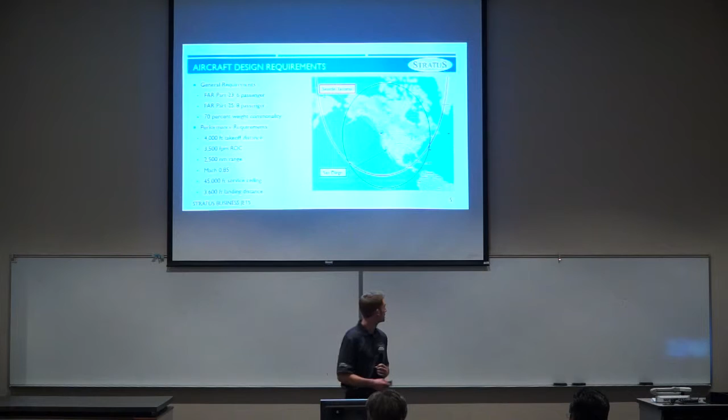excluding the engines. So in addition to short takeoff and landing field requirements, the primary objective of the Stratus jets is to provide comfortable, high-speed, long-range cruise. A range requirement of 2,500 nautical miles and a maximum cruise Mach number of 0.85 will allow customers to make the coast-to-coast journey in a reduced amount of time. As you can see by viewing the range map on the right side of the slide, even when departing from one extreme corner of the country, the range requirement is still enough to reach any other location in one non-stop flight.

Thank you, August. So, as he said, I'm just going to give you a brief summary of our conceptual design approach. Start off here with the constraint analysis for our 8-passenger Aria-1000. As you can see, we drove our design point down and to the right. By doing so, we maximized our wing loading and minimized the planform area of our wing, also driving down our thrust-to-weight ratio so we do not have unnecessary thrust and are minimally compliant. This leaves us with a thrust-to-weight ratio of about 0.4, wing loading of 66 pounds per square foot, thrust available of 8,800 pounds, and our max takeoff weight is 21,400 pounds, leaving us with a wing area of about 326 square feet.

Similarly, for the Aria-2000, our 6-passenger, again, the design point was driven down to the right. Thrust-to-weight ratio is a bit more here at 0.44. Our wing loading has dropped down slightly to 59 pounds per square foot. The thrust available is now 8,200 pounds due to the decrease in weight, which is now 18,700 pounds. Our planform area for the smaller jet is 318 square feet, which is only 8 square feet smaller than the larger one.

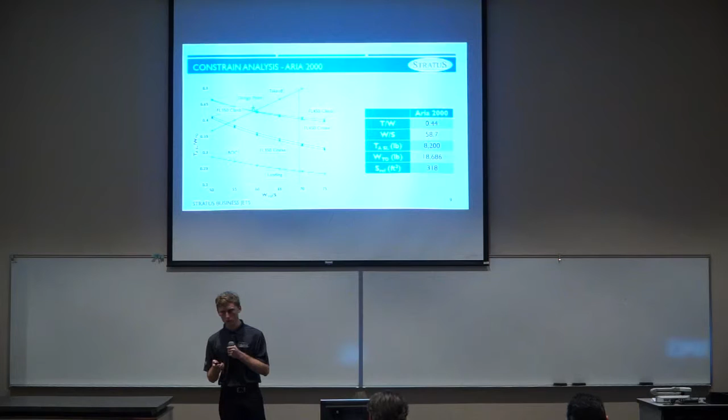So for our initial sizing, we started off with Roskam's Part 1. From this, we were able to output our fuel weight, empty weight, and max takeoff weight. Between these outputs and our constraint analysis, which was previously shown, we were able to come up with a planform area for our wing and the thrust required to meet our mission requirements.

So for our conceptual approach, above all else, was to be minimally compliant with the requirements set forth in our RFP. This includes the FAR Part 23 and Part 25, which was previously mentioned. We went ahead here with an inside-out approach, beginning with our cabin layout. As you can see, that is the cabin layout for the 8-passenger Aria-1000. We elected to have 2 seats facing forward and 2 backwards to package our passengers in the most efficient way.

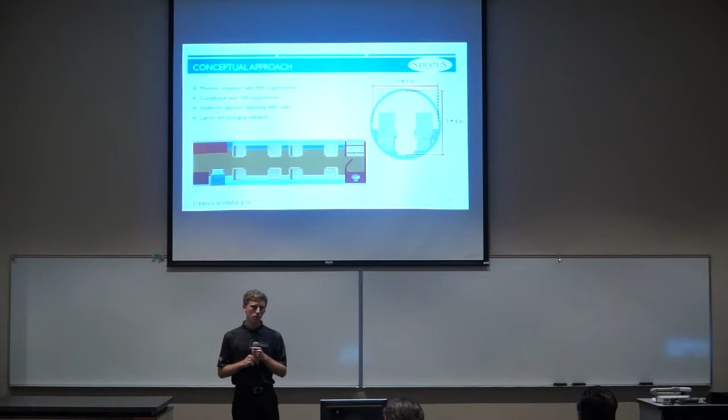That is also a cross-section of our cabin with a 5.5-foot overall height, including the step, and 5 3/4 width. This was determined based on comparable aircraft and also size to feel after our team visited Textron Aviation Service Center. So some of our most marketable features are our long-range capability, as previously said. We hit 2,500 nautical miles, which sets us apart from our competitors by about 20%.

We're also able to cruise at Mach 0.85, which lets our customers get to any destination they wish in a quicker manner. We have a large baggage area, as you can see. It can fit several golf bags and suitcases. There's about 100 cubic feet in the tail cone, as you can see there. We also have several windows and 2 skylights, which are not visible in this image, and those allow a lot of natural light for our customers. Lastly, we are capable of short field takeoff and landing, giving our customers access to a much larger number of airports.

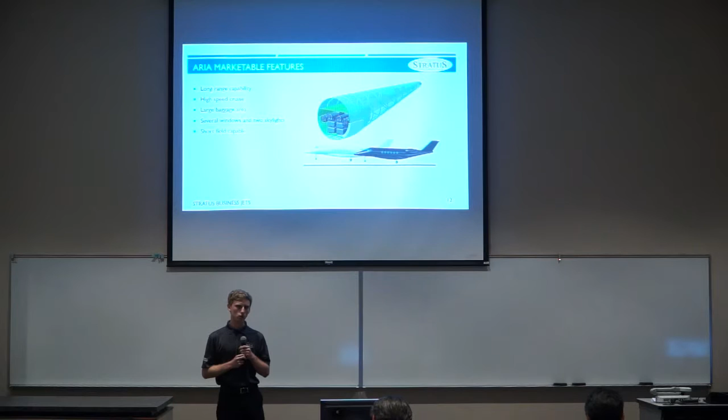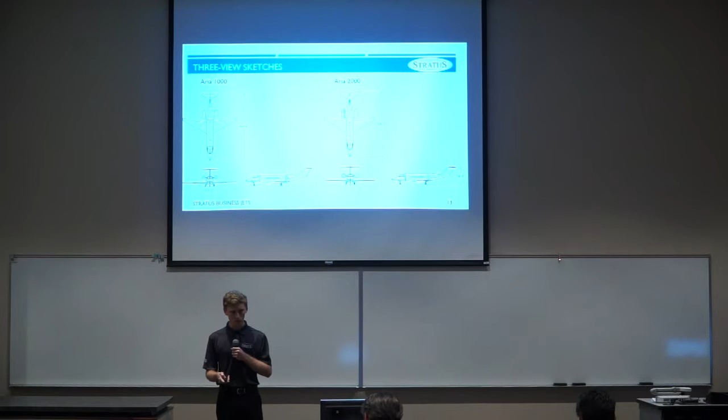So next up is Kyle Wimmer. He will be talking about aerodynamics. All right, thanks, Blaine.

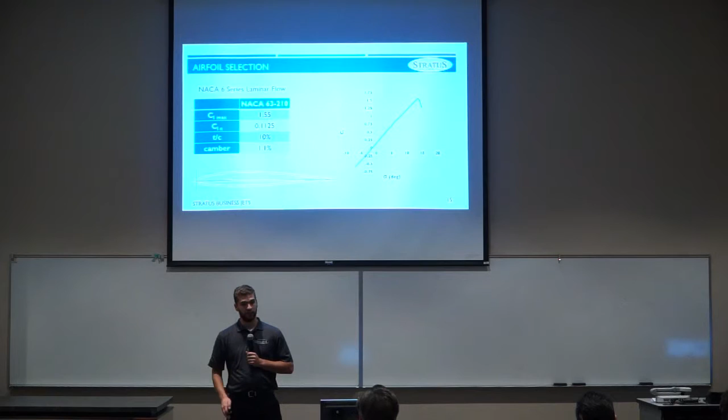So the first decision we had to make was what airfoil we were going to be using. We decided to go with a NACA 6 Series laminar flow airfoil, specifically the 63210. This is a 10% thick airfoil with a 1% camber. This allowed us to reach a critical Mach number of about 0.74 with this airfoil. Once we had the airfoil selected, we then began wing design. Knowing our reference or our planform area from the constraint analysis, we were able to begin sizing the wing.

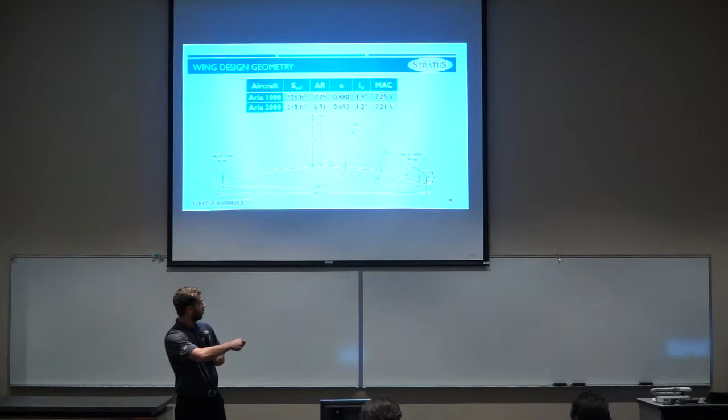As you can see here with the Aria 1000 and 2000, they are slightly shorter in wingspan. We just clipped the tips a little bit to adjust for the wing loading for the Aria 2000. This yielded us an aspect ratio for the 1000 of about 7.75 and about 6.9, with an E of 0.68 for the Aria 1000 and 0.69 for the Aria 2000. Once we knew our cruise weight, we were able to calculate the lift needed and solve for the incidence angle of the wing. This helped to minimize our trim drag throughout our cruise phase.

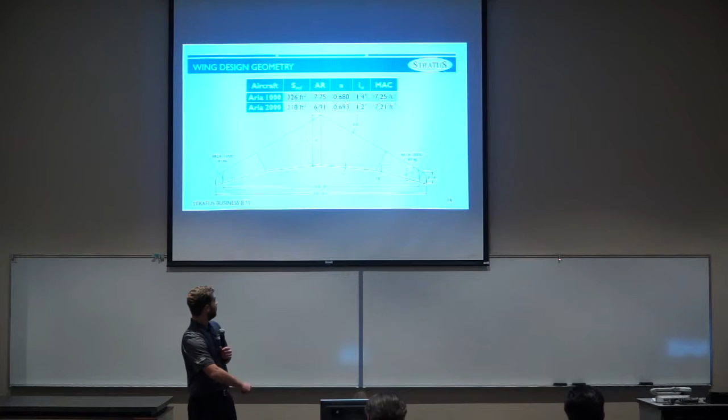We did sweep the wings approximately 29 degrees, and this allowed an increase in our critical Mach number from 0.74, as I previously mentioned, to almost 0.77. Once we had the wing, we were able to adjust the 2D lift curve slope for the airfoil to a 3D for the wing. This yielded us a CL max of 1.25 at a takeoff condition with 15 degrees of flaps, at cruise 1.0, and at landing with 35 degrees of flaps, 1.53. Our required CLs for takeoff and landing are below the maximum, allowing us to stay out of the stall region.

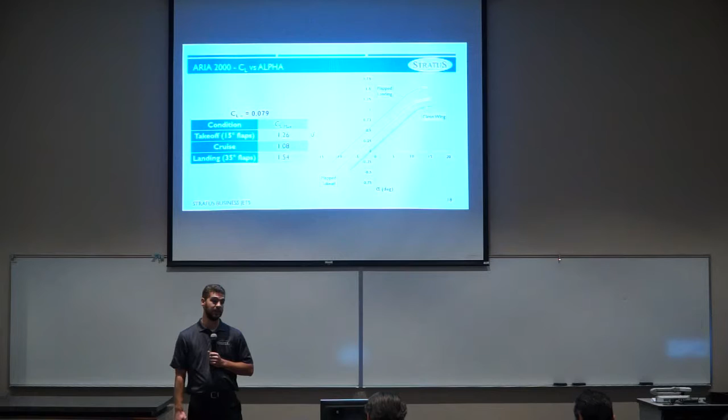Though the CFE method is fairly accurate for a first estimation, we did go more in depth, calculating the CD0 for each component and summing them all up. This allowed us to take into account transonic wave drag once we hit our critical Mach number.

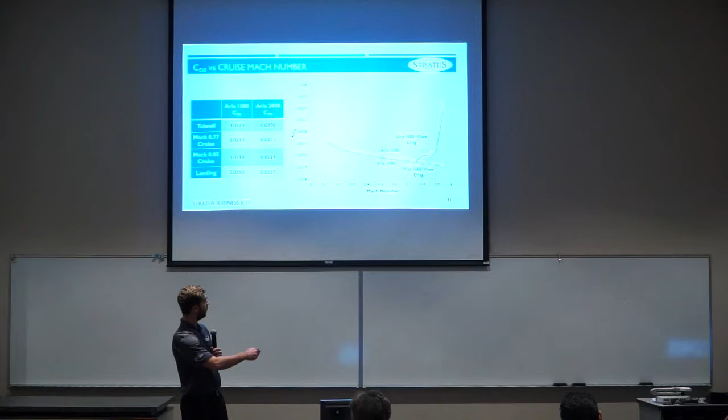The table on the side shows all of the CD0 values for various phases of flight, as well as the figure which shows where our transonic wave drag kicks in. Once we hit our critical Mach number of around 0.76, we start to get a slight increase due to the transonic wave drag. That increase spikes once we hit our drag divergence Mach number between 0.85 and 0.9.

A similar method was done for the Aria 2000. However, due to a slight increase in the CD0 values for the Aria 2000, the maximum L over Ds did decrease to around 13.5 and 13 respectively.

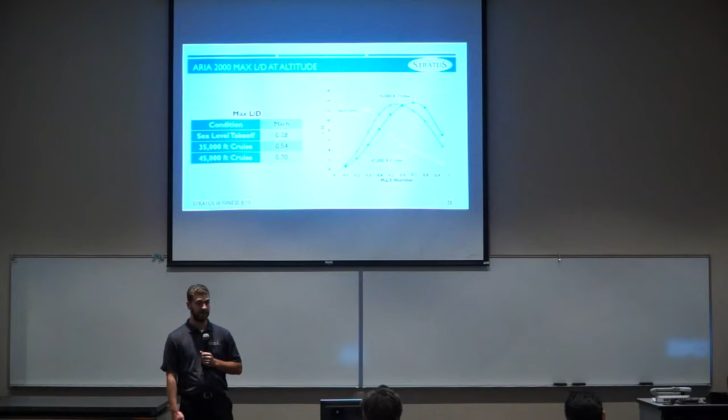And the same was for the Aria 2000. Again, due to the increase in CD0, the maximum Mach number for the best L over D did decrease slightly.

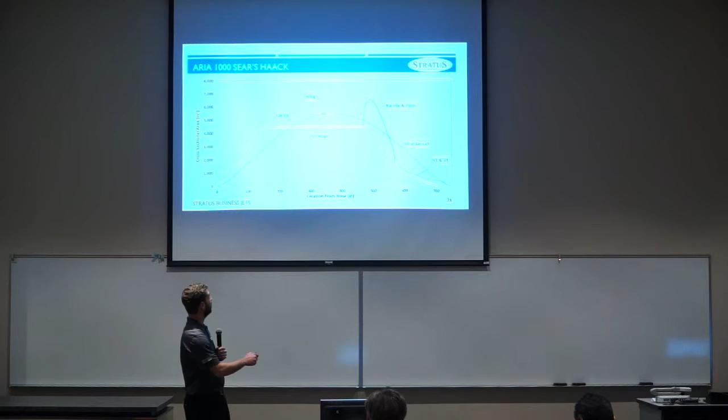Since our aircraft is cruising at a high Mach number, we looked at a Sears-Haack of the aircraft. The dashed blue line is of an ideal aircraft, and as you can see, we're far from it. This is due to the nature of business jets, the placement of the wing and engines, creating the double bump, which you see here. This is just the price that we have to pay for this type of configuration.

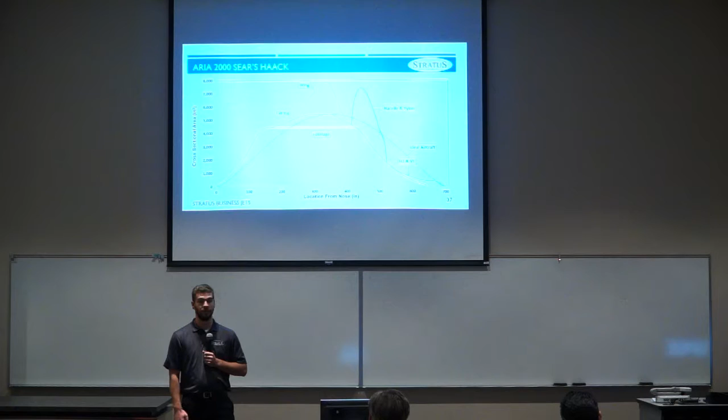The fairing, though, does do a nice job of smoothing the transition between the fuselage and the wing, which is one of its main purposes. The same was for the Aria 2000, with a slight increase in the nacelle and pylon due to a longer nacelle for a longer engine, as well as a little larger diameter. Next, I'll pass it off to Sho for performance.

My name is Sho, and I'll be introducing performance of our aircraft. Thrust available and thrust required for these two aircraft were calculated using the density ratio and the TSFC ratio according to each altitude of the aircraft. For Aria 1000, we have an initial rate of climb of 5,000 feet per minute, which is right after the takeoff.

And max rate of climb at 35,000 feet altitude, which is the cruise altitude, we have 2,200 feet per minute, which is shown in the blue lines. And at the service ceiling, we have 700 feet per minute. For the service ceiling, we are required to have just 100 feet per minute, which is exceeded very well, shown in the green lines as well.

For Aria 2000, we have an initial rate of climb of 5,100 feet per minute, and at 35,000 feet, which is the cruise altitude, we have 2,200 feet per minute, and at the max service ceiling of the aircraft, we have 550 feet per minute, which is shown in a green line, as well as the cruise altitude on the blue line.

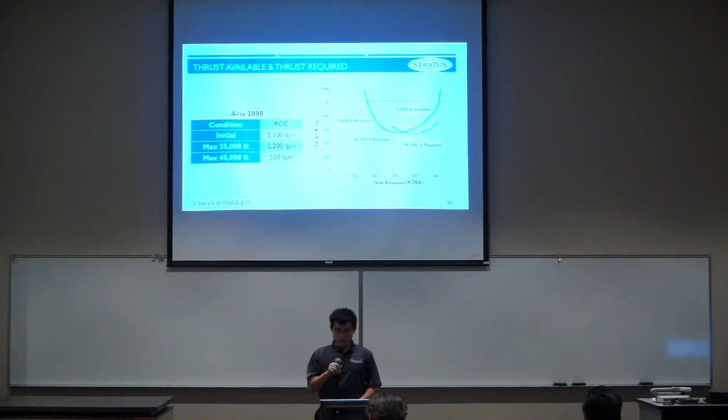We get the specific excess power envelope. This is also analyzed using density ratio and TSFC ratio according to the altitude. On the right side of the plot, we have an anomaly going on. However, this is possibly due to the fact that the aircraft is going at the high end of the subsonic, which brings wave drag in as well, which we think is the case. This will be further investigated next semester in the detailed design of this course. This is the excess power envelope diagram for the Aria 2000.

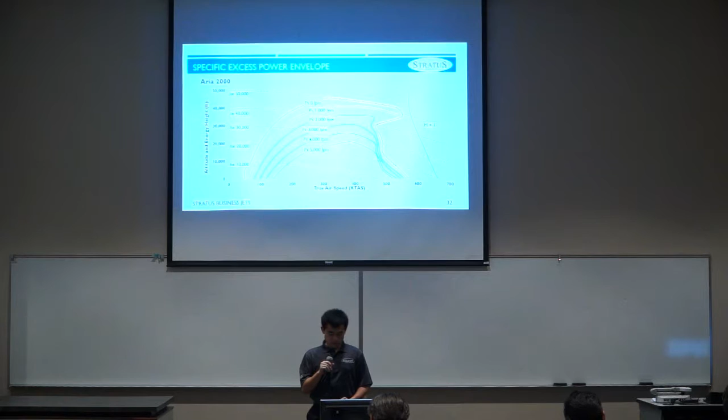Our aircraft market points are the range and the payload that we can have for passengers. For the cruise altitude, we have a 2,500 nautical mile range with 4 passengers and 2 pilots under FAR 25, and we have a linear relationship going down with more payload on.

For the range and speed relationship, we have 2,500 nautical miles at a Mach number of about 0.75. This is without any of the takeoff, landing, or maneuvers. It goes down as the speed goes up. However, since this is a business jet, going faster makes it travel quicker, which is more or less better. And that is something we decided to go with, paying for the drag of the aircraft.

We have a very similar relationship for the Aria 2000 as well. We have 3 passengers as a long-range cruise condition, along with just 1 pilot under the requirement of CFR Part 23. And it goes down to the 500 pounds of maximum payload with 6 passengers and 2 pilots, a total of 8 persons in the aircraft. We have the same relationship with the range and the speed on the right-hand side of the slide.

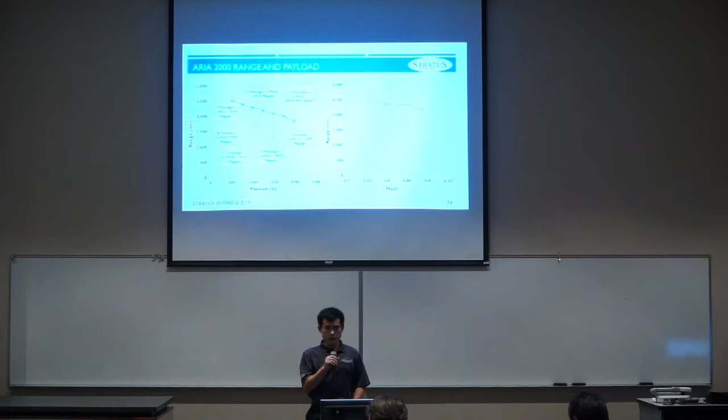For the takeoff of our aircraft, we have 3,780 feet for the balanced field length, which is under the 4,000 feet requirement for the takeoff process. For the Aria 2000, we have 3,400 feet, which is also under the requirements. We have a climb angle of 20 degrees for the Aria 1000. The Aria 2000 has 21 degrees, and the Aria 1000 has a FAR 25 clearance requirement of a 50 feet obstacle. On FAR 23 for the Aria 2000, we have 35 feet of obstacle clearance, and that is included in the calculation.

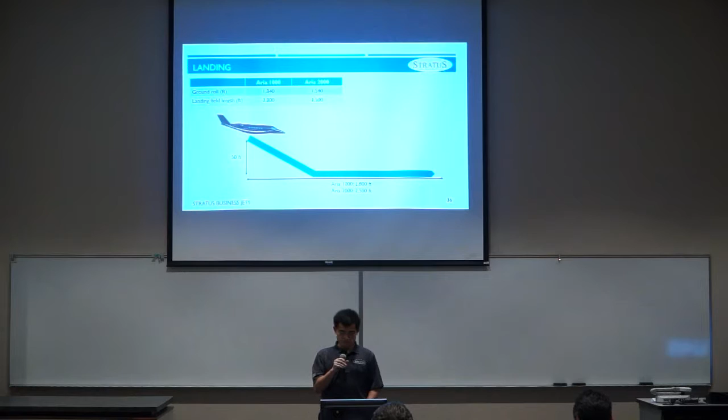For landing of our aircraft, we have a ground roll of 1,840 feet for the Aria 1000 and 1,540 feet for the Aria 2000. For landing field length, the requirement is 3,600 feet: 2,800 for the 1000 and 2,500 feet for the 2000. Both of them are well under the maximum required length. This is clearing the 50 feet obstacle coming into the airport. Now we are introducing propulsion. I will hand it to Tatiana.

Thank you, Sho. I'm Tatiana Toriani, and I'll be talking about the propulsion system for both aircraft. The engines chosen were based off of the thrust-to-weight requirements stated by the design point in the constraint analysis. The Honeywell TFE731-40AR was chosen for the Aria 1000, and it is also used on the Gulfstream G150, which is a comparable aircraft. The Pratt & Whitney PW545 was chosen for the Aria 2000, which is also used on the Cessna Citation XLS, another comparable aircraft.

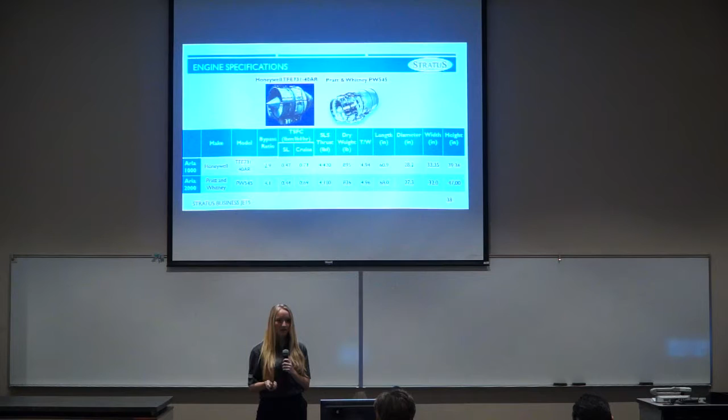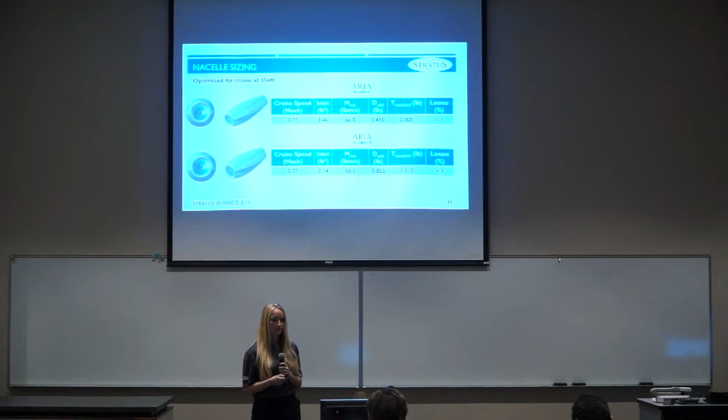Good morning, everyone. My name is Cody Johnson, and I'm going to be talking to you about the stability and control for the Aria 1000 and the Aria 2000. So the basic design for our aircraft was to be minimally compliant with the FAR 23 and 25 requirements, as well as meet any other maneuverability and stability requirements. Our design philosophy was such that the empennage would be the same for both aircraft, so we would meet the 70% similarity between our two designs.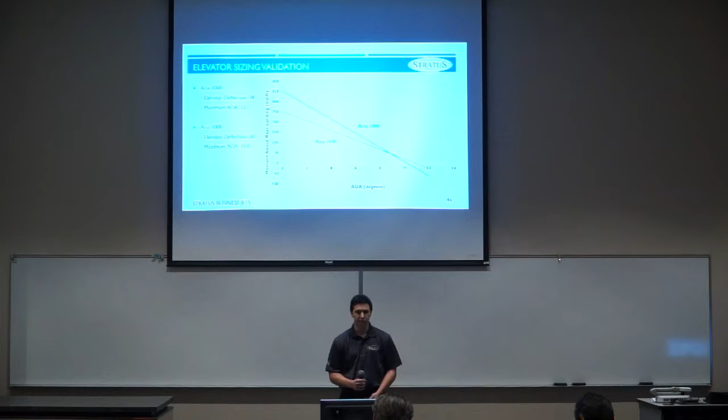The reason we're left of the grouping is because we had to have a slightly smaller than nominal surface sizing for the elevator to push our aerodynamic center forward and reduce our static margin. However, we are still able to meet all of our performance and stability requirements. Our elevator can produce a positive nose-up pitching moment for takeoff beyond our rotation angle of 7 degrees with just 28 degrees of deflection for both aircraft. And that's shown in this graph above.

To size the rudder, we started similarly with comparable aircraft, and then we iterated through until our aircraft was in compliance with our requirements. We nest pretty closely with all of our comparable aircraft right there in the center. The verification for our rudder sizing was to meet the FAR requirements at 23 and 25. The first of those two requirements is crosswind landing. We had to be able to land with 25 knots of crosswind. We were able to complete this with 33 degrees of deflection for the Aria 1000, and 33 degrees of deflection for the Aria 2000.

The other requirement was we had to be stable with one of the engines out. To do these calculations, we assumed one engine was on maximum thrust, and the other was acting as a flat plate, creating maximum drag. And we were able to compensate for that kind of moment with 9 and 8 degrees of deflection. So we were in compliance with those requirements.

We also had to calculate the static stability and damping derivatives. Our static margin for both aircraft is positive for all flight configurations. And our flight configuration static margin shifts 2.6% on the Aria 1000 and 4.8% for the Aria 2000, which minimizes trim drag because those are pretty small ranges. All of our static and damping derivatives are also within stable ranges, as you can see in that lower graph. So we do meet all requirements. We are a stable aircraft, and we meet the FAR requirements as well as our other stability requirements.

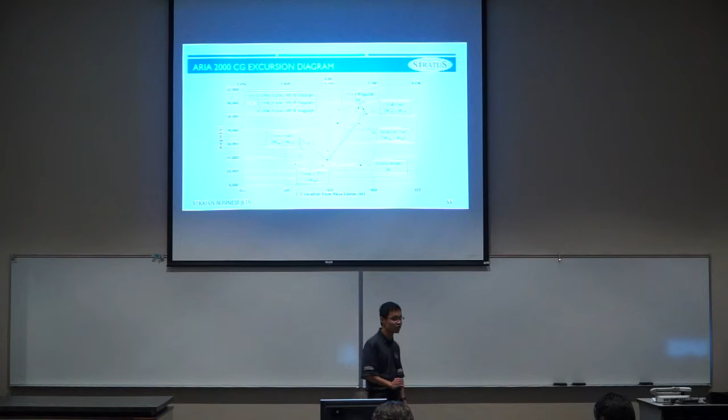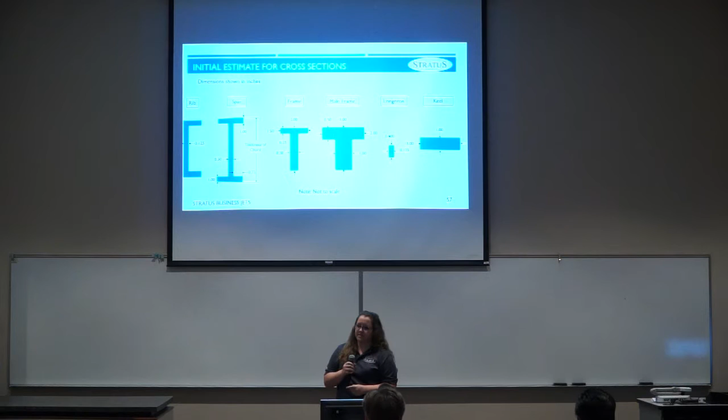So this first slide just talks about some initial estimates for cross sections that you will see for some models in the next couple of slides. So as you can see, our rib is modeled as a C-beam, our spar is modeled as an I-beam, the frames are modeled as T-sections, and the longeron and the keel is modeled as a solid rectangular beam.

On this slide are the wing and empennage structural models. As you can see, the front spar is at 15% of the chord, the rear spar is at 75% of the chord, and we do have an additional landing gear spar due to where we had to place our landing gear due to the CG. The four ribs connected to this landing gear will be thickened, and there is also an additional mainframe to account for additional loading that would be placed on the spar during landing.

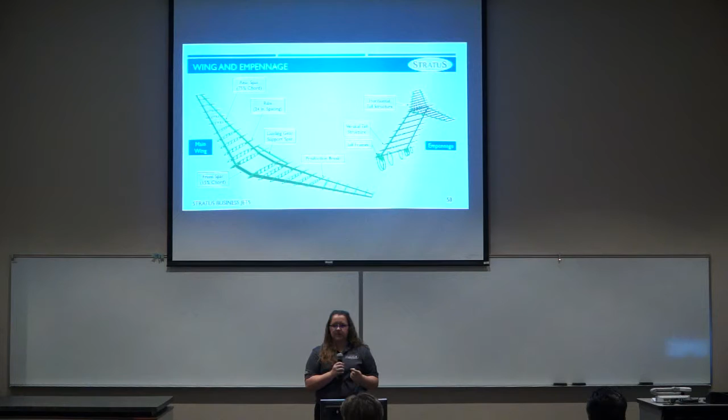The ribs of the wing are every 24 inches, and this is based off of Roskam's method. There is a production break in our wing, so you can tell that the ribs are initially parallel to the fuselage and then are perpendicular to the leading edge of the wing. The horizontal tail and vertical tail have a very similar structure, same cross sections on all of their members. The only difference is the spacing due to their smaller size. You can also see that a couple of the tail frames are thickened where the vertical tail is connected to our tail cone.

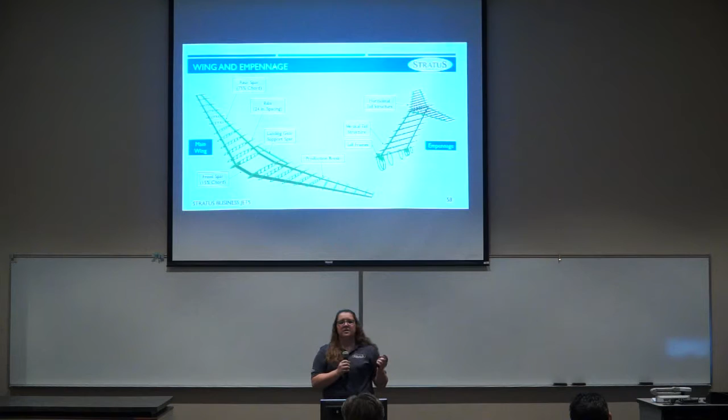This is various bodies of our aircraft. So along the fuselage, the frames are every 24 inches. Again, that is in accordance with Roskam's initial estimate methods. There are three main frames that are thickened, and those are attached to the spars of our aircraft. There are longerons every 6 inches around the circumference of our fuselage. The spacing of the frames and the longerons is followed into the nose cone. There is an additional frame in the nose cone to support the windshield in the cockpit.

The fairing on the bottom, the keel, had to be added because we are carrying fuel within our fairing and we had to be crashworthy. The frames are placed every 24 inches, and that is so that they're in accordance with the frames in our fuselage. It should be noted that the fairing actually continues up to the fuselage to have a solid piece and support the whole loading that would be placed on the fairing in case of a belly landing.

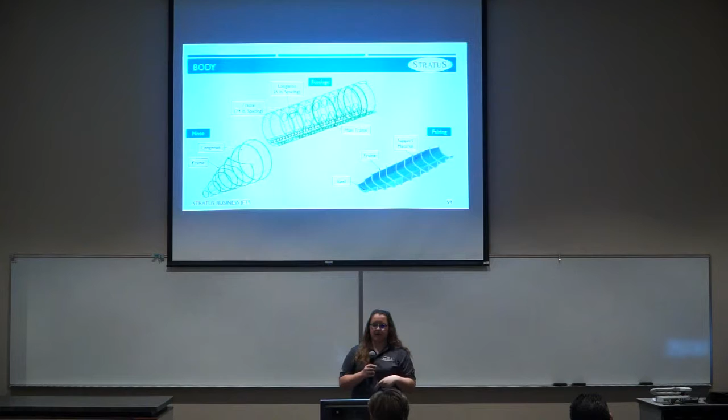Here you have three different estimations we've done on our wing using Schrenk's approximation. The lift distribution, you can tell, is very even, and it's very similar to an ideal situation. The data in the shear and moment diagrams will be used next semester when we calculate the loading on our wing.

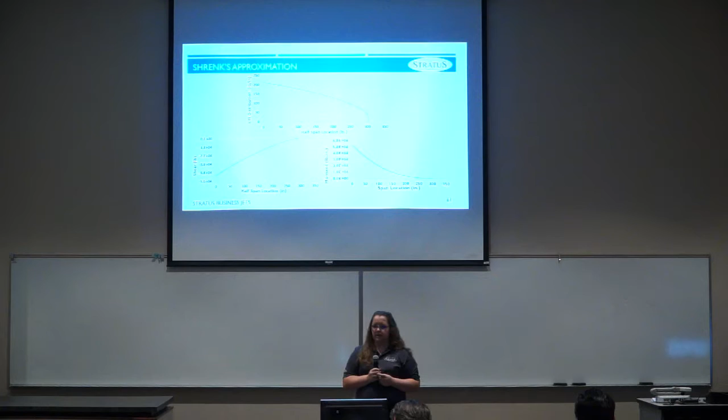And now I'll hand it off to Mohammed to talk about landing gear. Thank you. Good morning, everyone. My name is Mohammed Al-Jihadi, and I'm going to review the landing gear of the Aria 1000 and the Aria 2000. A tricycle single-wheel configuration has been chosen for its light weight and simplicity, which is commonly used by other aircraft that have the same size and weight.

The nose gear and the main gear are using a hydraulic actuator to extend and retract, and they are using an oleo-pneumatic shock absorber with a scissor link to support the suspension system, and equipped with high pressure nitrogen for emergency scenarios. While the main gear is mounted to the wing, the nose gear is folded under the avionics cockpit.

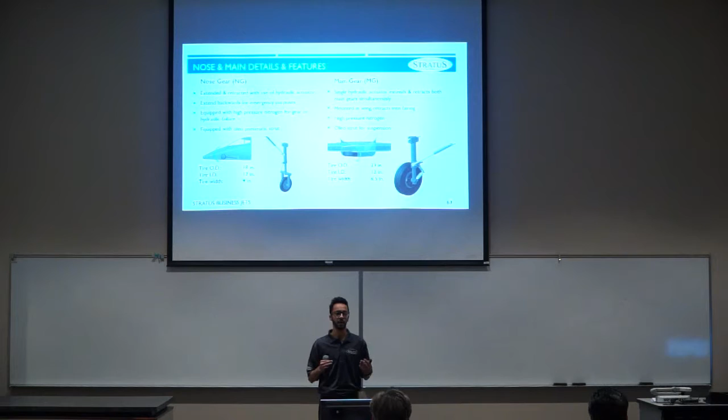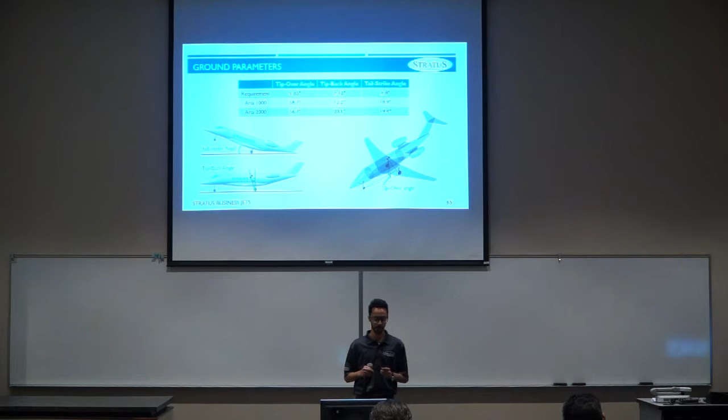For the tail strike angle, or the maximum angle before the tail hits the ground, we can see that the Aria 1000 and the Aria 2000 have a higher angle than our rotation angle. And now with human factors, Ian.

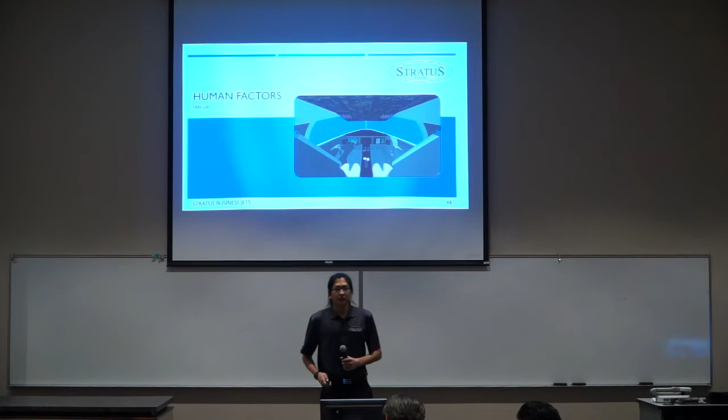Hello, I'm Ian Lai, and I'll be talking about the human factors in our aircraft. So for our control arrangement, we've decided on the side stick control for the cockpit, or the flight control. This is chosen because it is a more modern design, and it's more intuitive for the pilots. It also opens up the cockpit more, so there's more room in the cockpit. There's a mechanical linkage to the primary flight control surfaces with a hydraulic assist.

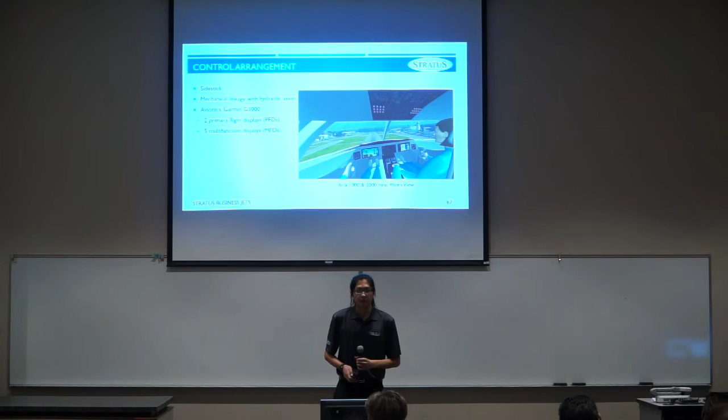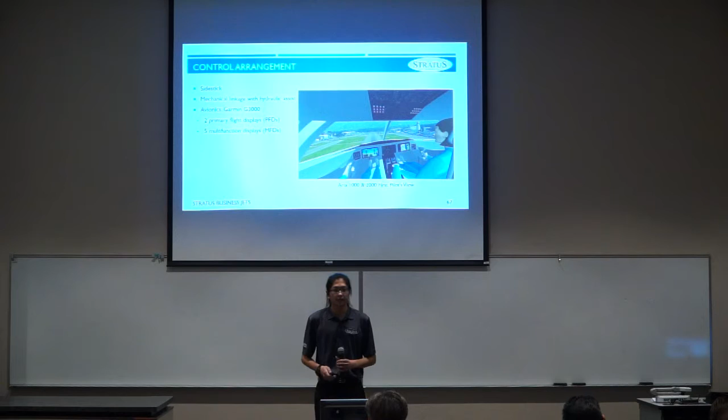For the avionics, we have chosen the Garmin G3000. That is installed on most of our comparable aircraft. We have two primary flight displays on the flight deck and 5 multifunction flight displays.

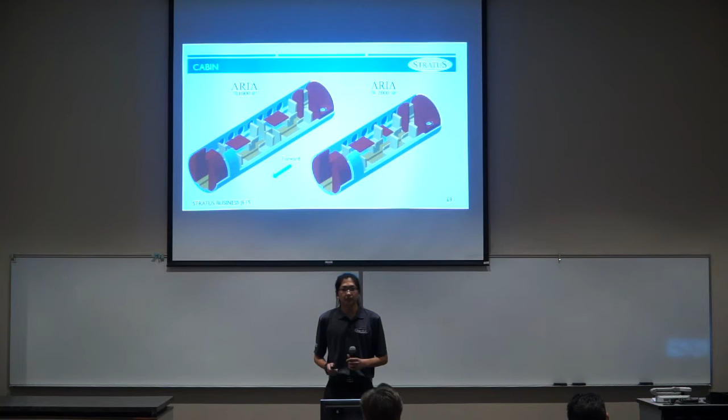Some key features, though: the aisle widths are 12 inches across. The seat pitch, which is the distance between one point on the seat to the same point on the next, is 31 inches. The tables are stowable to allow more room in the cabin. It is equipped with Wi-Fi, so the passengers can stay connected during the flight for entertainment purposes or to conduct business. Also, there's plenty of room in the cabin, and it's well lit with natural lighting from the amount of windows and the skylights. Next, I will talk about the systems on both of our aircraft.

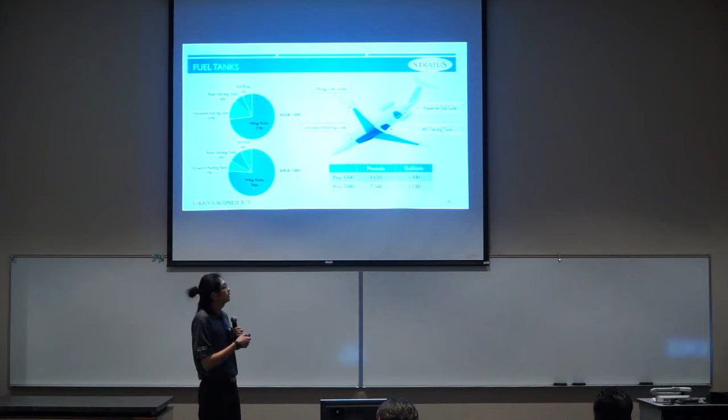This is a picture of our fuel tank. As you can see here, we have the wing fuel tank, our main tank; most of the fuel is located in the wing. We have the forward fuel trimming tank in front of the wing, and the aft trimming tank behind the wing. The reserve tank is located in the tail section.

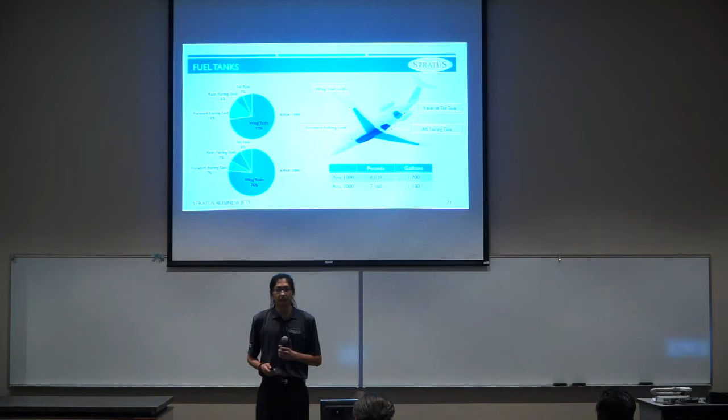The reserve fuel tank will hold the FAA requirement of an extra 45 minutes of loitering time, as well as the NBAA requirement of an extra 100 nautical miles of detour. In total, the Aria 1000 will hold about 8,000 pounds of fuel, and the Aria 2000 will hold about 7,500 pounds of fuel.

And for the hydraulic systems, the main components of the hydraulic system are located in the tail section. They include the main pump, the backup pump, the reservoir, and the accumulator. They are easily accessible by the maintenance crew from panels on the side of the tail section. We have piston actuators to actuate the landing gear, the thrust reverser, and the brakes. And rotary actuators, which are connected to screw jacks, will actuate the flaps.

The main pumps and the backup pumps can be powered by either the engines or the APU. And if any of the 3 engines fail or if any of the systems fail, we have stored nitrogen located next to each of the landing gears, which will apply pressure to the landing gear pistons and extend the landing gear and lock them in place for a safe landing. Next, August Gearing will provide the summary.

Thanks, Ian. So we'll wrap up our presentation today with just a few final notes. The thing to note here: we are currently compliant with all of the requirements, both performance as well as commonality, that were set forth in the RFP. You can look at this table here. We are a bit over compliant in a few areas, and that's something that we will be looking at in the future semester, reducing that excess capability.

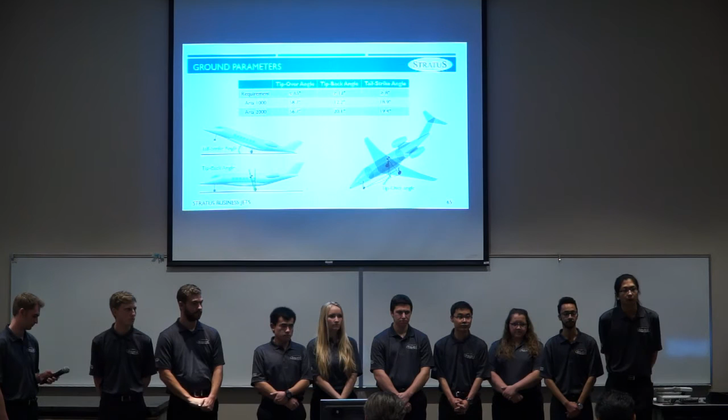On slide 16, I thought it was really cool how you overlay both wings. I thought it'd be nice though to have them in 2 different colors so you can quickly see that, it's just easier to read, just little things, you know. So I thought it was pretty squared away. Business jets aren't really my background, so it's a little different for me to try to think this way, but I thought it was pretty good. Yeah.

Okay. Overall, I liked that you presented a lot of data. The other thing I didn't like was you presented a lot of data. On some of these, I tend to get lost because we're going back and forth. Like I said, it's all there. Everything is there. But trying to make sense of it, like if I were an investor. I mean, I own a company anyway, so it's almost like you're trying to sell this.

On some of these, you kind of need to see, all right, here's the requirements, because you have to repeat them in every slide. If you're going to show something, here's the performance, here's the actual requirement, you repeat it again, and then show here's how we met it. And then at the bottom say, yeah, we met it, and here's the margin on it. I didn't quite get that out of all of these.

You kept going back, well, RFP said this, and we met it per this requirement, but it's not stated in here. Because someone looking at it will be like, okay, I have to reverse engineer what the heck they did, you know. And it's not a dig on you guys at all. It's just the way it's presented. I like what you did. There's a lot of information to try to digest, and there's a lot of slides.

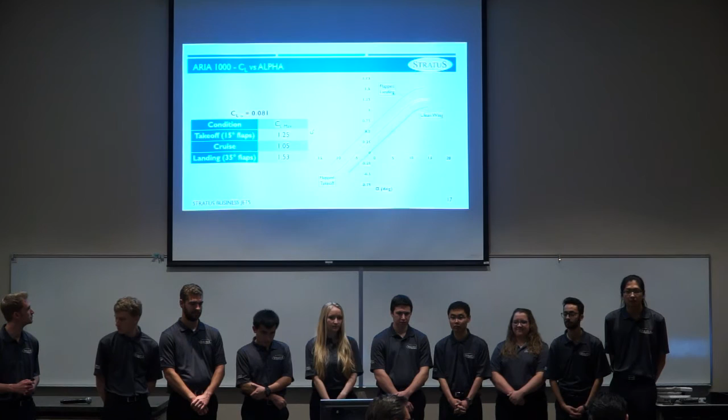So yeah, and then continue to be nitpicky, back to the thing about percent margins. Even go back to the ergonomics design on slide 44. You're showing effective area, ineffective area. It's a nice picture, but there's no percentage up there. There's no, okay, the target percentage is this, this is what we have, so don't worry about it, right? I should have folded them the way we did. That would have been more organized.

So you're going back to showing what that means, just little bits like that. It allows the audience to just look at it and say, okay, that's what they're trying to tell me. It's always: tell them, tell them what you told them, tell them again. But overall, good job.

Okay, I'm going to start from the back to the front. Really good job. You can tell that there's a heavy Crisler influence on this. You're making these things work really hard for you, so I like that. You're learning from one of the best, in my opinion. So, conclusions and recommendations, last slide, 75. Structural analysis using FEA is recommended for the detail design. You should do some hand calculations at this point.

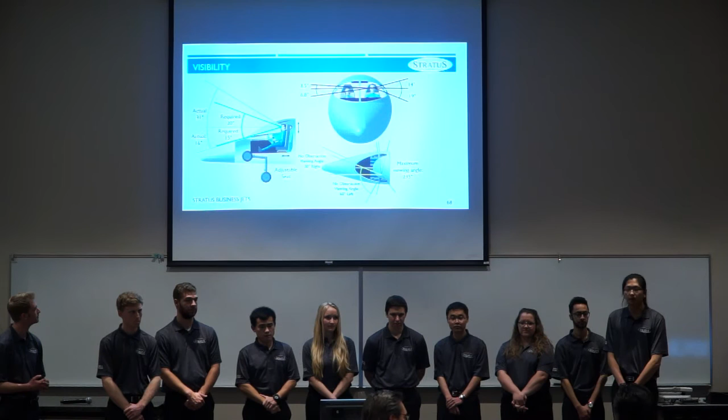Yeah, just show something else, or just change the color. Or just take it out. Yeah, just take it out. I kind of see what you're trying to show though, is that you have these gaps in visibility. So just change the label on that, and you'd be able to solve that whole problem.

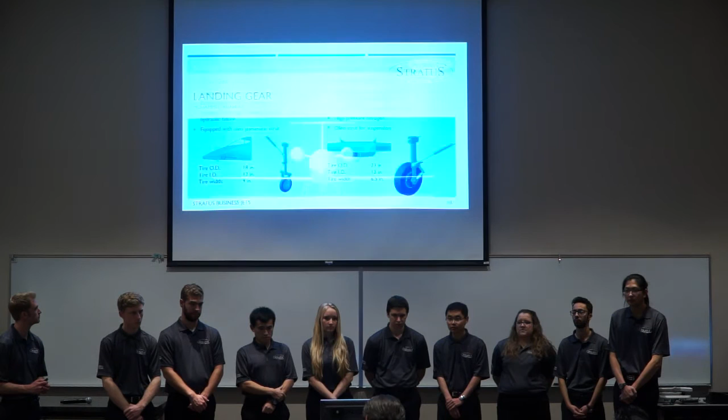Let's see, slide 60, V-n diagram. Really, really good. I love these. There's so much information here, but there's a couple of pieces that you could actually add to this. And one is calling out your VNE, or V sub D. All right, that's 800 knots, or 800 feet per second. Feet per second? Wait a minute. I don't think airspeed indicators have feet per second on them. I mean, knots. Need that, all right? So I didn't even see that first time around.

So V sub D, VNE, and then cruise speed, easy to put on there, and then V sub A, maneuvering speed, also easy to get, corner velocity. So those are easy pickouts to put on there for more information, if you really want to make the slides work even harder for you.

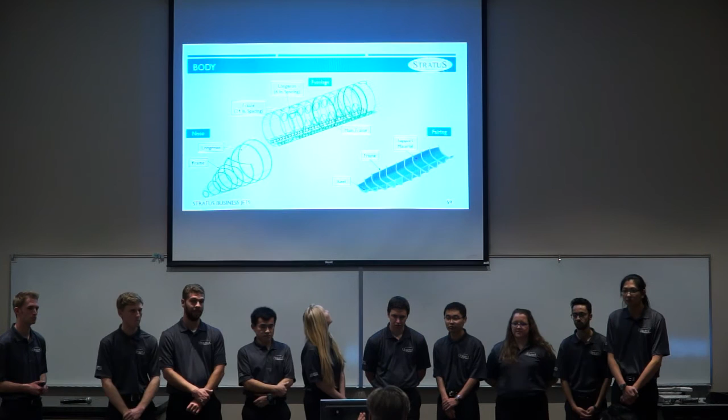Hey, these skylights you talked about, let's go back one slide, 59. This is really cool. I was thinking, wow, now I see one. But it looks like there's a longeron that goes right through it, or do you open it up? Does it fit within the longeron spacing? The longeron should be outside, but it might be hard to tell because it might just be behind. Okay, all right. So you basically have enough opening in the longeron spacing to put these nice skylights through. Oh, I see, there they are. Okay, got it. All right, nice feature.

57, I really like this. Initial estimate for cross-section, you put some thought into what the ribs are going to look like, cross-section, spot frame, mainframe, all that stuff. I love it. You guys have actually put some thought into this. You got it there. Good chart.

So let's go to slide 49. Your static stability and damping derivatives. There's this neat little parameter that I learned about the other day. I think it's the CL beta over CN beta ratio. A ratio of CN over CL or CL over CN that kind of gives you some insight into the dynamic stability. Did you guys work that at all? I hadn't heard of that parameter yet. No. Okay, all right. Let's see.

Rudder sizing validation, slide 48. Great that you did this, but I wasn't sure how you did it. What was the method? I had used methods outlined in Napolitano and Yechout. For forces, they assumed maximum thrust on one engine with a maximum drag on the other. Okay. And then it was just outlined in there. You had to get all the CN beta and those kinds of coefficients, and then there's a moment balance. Okay, all right. I wasn't sure if you used a method like that or if you used actual CFD. Oh, no, it was a balance. Got it, okay. All right.

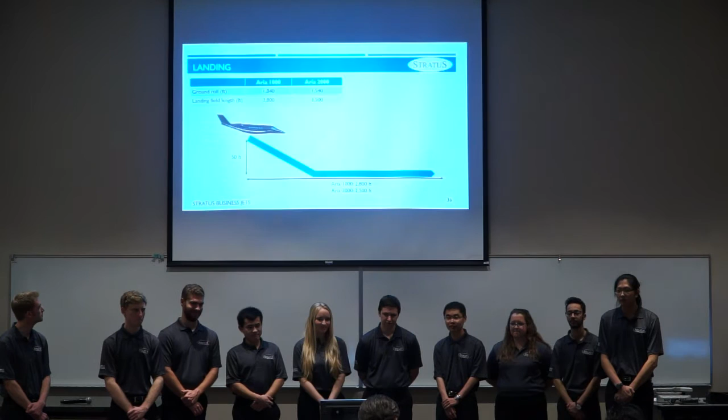Let's see. I'll skip over my positive comment. There's a lot of really good stuff here. Let's see, the nacelle sizing, slide 39. Tatiana, we got that, right? Your losses due to engine installation, less than 1%. Is there something that supports that? I mean, that seems to be a pretty low number. I'm used to now working with props, right? Can you really realistically expect a less than 1% installation loss?

That's probably an ideal value, but I went through all the calculations with Dr. Elliot Briner from the propulsion department, and he sat with me and confirmed it. Okay. And this is what we ended up getting. This neglects some nozzle drag though, so it's not 100%. All right. What do other airplanes typically get? Did you do any kind of comparison with real airplanes that exist? I couldn't find that data. Oh, okay. All right. Let's see. Covered that one already.

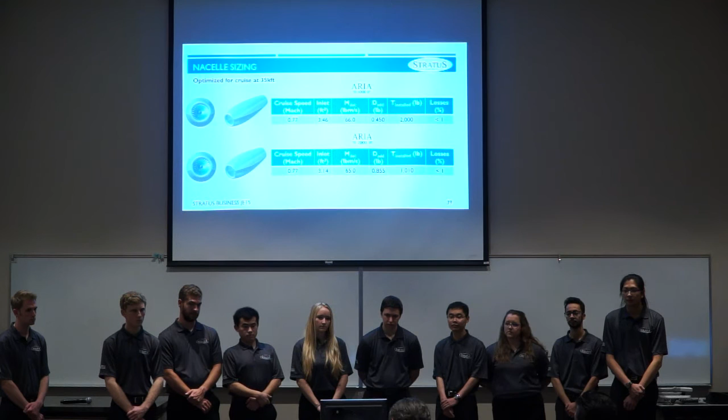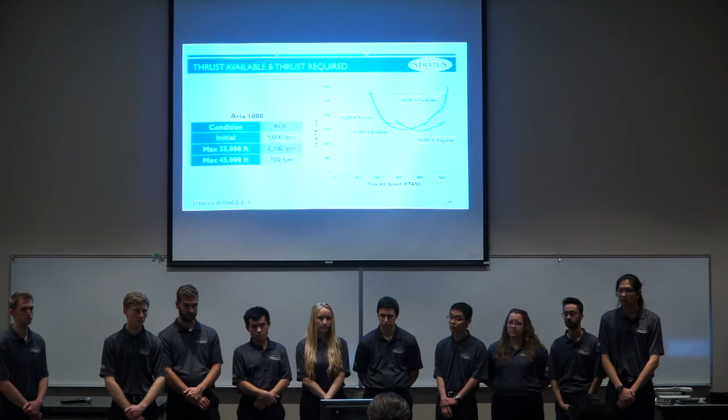Slide 29. So it looks like at 45,000 feet, you have 700 feet per minute rate of climb capacity. So theoretically, your service ceiling is higher than 45,000 feet. Our service ceiling is about 47,000. So how do you know that? We continue our calculations of drag and thrust available at higher altitudes. The reason the 45 is presented is that is the required service ceiling. Right. So we're just showing the fact that we do meet that. Yeah, you've got margins, so that's pretty cool. So I guess you could go to the P sub s diagram, slide 31, right? You ought to be able to pick it up from that. All right, let's see what else.

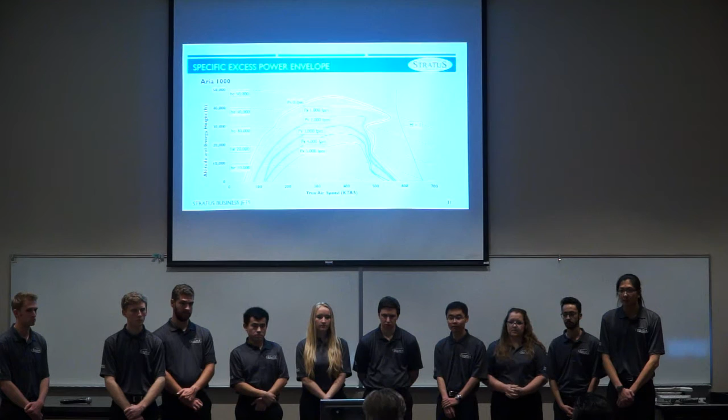Okay, no, I was looking at the wave drag. The last term, I think, is wave drag, is that right? No, it's the coordinate transformation that moves that otherwise symmetrical CD off it. If you had a symmetrical situation, it would be centered on the axis. Got it, okay. You get an advantage from the camber, an adjustment for camber. You get useful lift at your minimum drag. Got it. All right, thanks, that's good. Okay.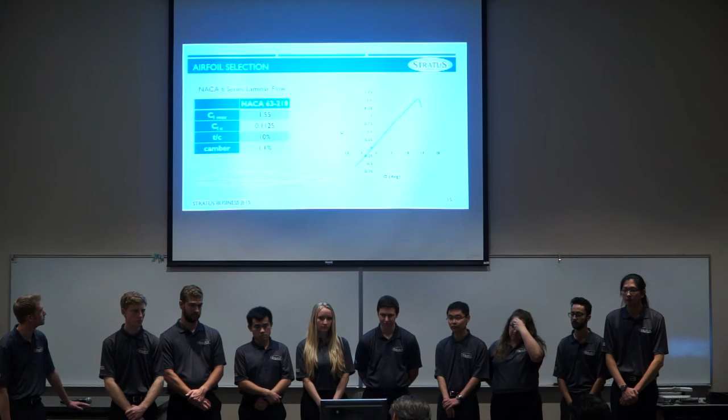Oh, slide 12. And I think I'm gonna wrap up my comments here. You've got marketable features listed here, but you don't have any numbers, and numbers on this slide would make this a really powerful marketing slide. If business development or BD was in on this, they'd be going, yeah, okay, my mouth's watering, I'm really excited here, but tell me some numbers. That's it.

One last one here. Let's see, slide 11. Minimal compliance kind of has a negative connotation. Another thing you want to do with business development, engineering, that's great. Yeah, you want to just meet the requirements. You don't want to over-design or overbuild and get it to be too expensive. But a better term might be, say, optimize compliance, so that it doesn't have that negative connotation of, yeah, we just did the bare minimum here. We've really thought about this and we've optimized our compliance, so it's kind of a better positive spin on it.

Think about the business side. This guy right here is awesome. From a business standpoint, I think this is fantastic. I've never seen any class do this, but I like it a lot. This is very, very cool. So, nice job, you guys. You guys have obviously done a lot of work on this. The presentation was really, really well done. And I thought the package looked good too. So, congrats. Thank you. Thank you.

We'll see you guys again in detail. We have some other faculty members here. Anything you want to add? Cool. Two questions. Whose idea was it? Okay, he gets an extra point.

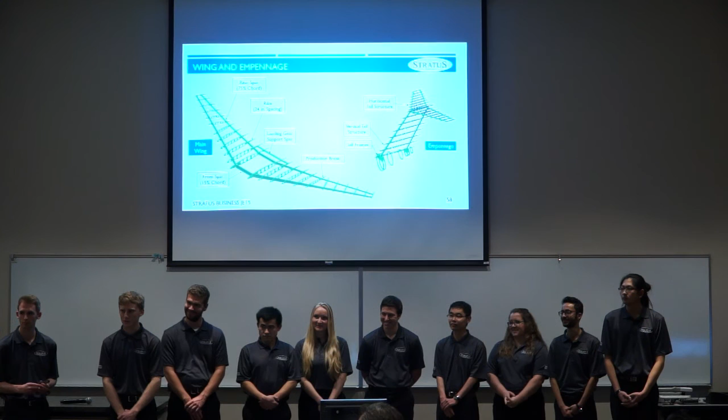Couple of teachable moments. Go back to the slide Professor Zlick was talking about when you left the numbers off. When you leave the numbers off and you say things like good, impressive, that's called an unsupported assertion. And if you're talking to somebody that knows what they're doing, you immediately raise a red flag. Just don't. Numbers. They dispel suspicion. They build confidence. They enhance your credibility. Put the numbers on the slides. Better yet, a visual. There are multiple places, we talk about this all the time. Anytime you can put a dimensioned figure in instead of a table, that's going to make communication that much better.

I believe y'all figured out pretty quickly that the sooner you start doing CAD for these projects, the better things go. And it shows, the CAD is very mature, I'm very happy. You've got a good foundation for next semester, getting the outer mold line to do your wind tunnel model, getting the inner structure pieced out so you can do finite element analysis.